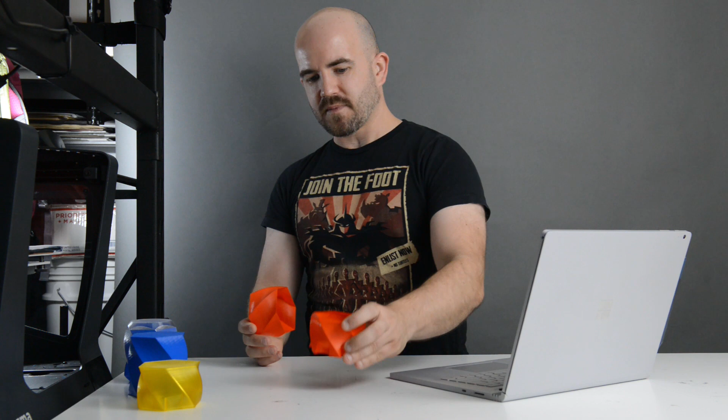However, I'd hate to think that anyone felt that they couldn't do it, because it's really easy, and we'll be going through step by step how to do this in Tinkercad.

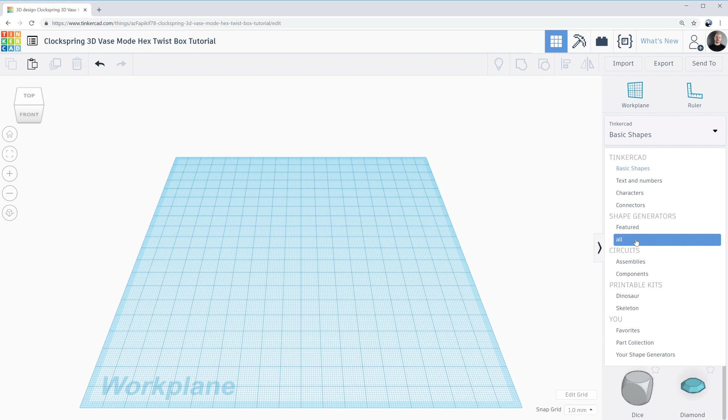So let's use it. If we look over on the right-hand side here, we'll see a drop-down from which we can select Shape Generators All. And that'll start loading up.

Now somewhere in here, and I've done this before so I already know it's on page 6 for me. That may vary depending on the resolution, and I'm running a fairly low resolution for this recording. Twisted Polygon is the thing that we want, so we can just click on that, drag it into the work plane, and there we go.

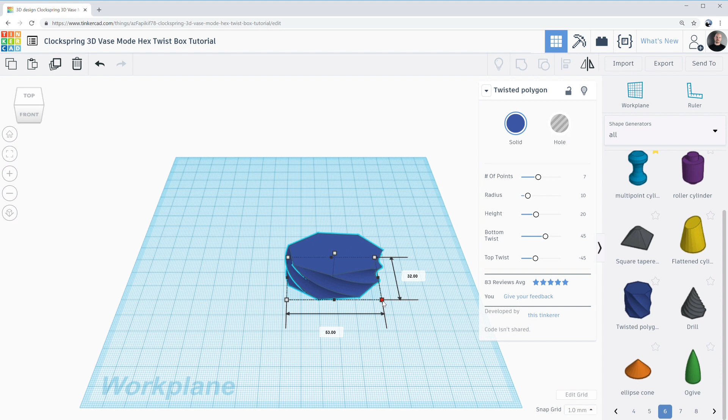Now we need it to be bigger, and it's tempting to just grab this handle and drag it out, maybe hold shift down at the same time and change it to whatever size we want it to be.

However, notice how there's a slight discrepancy in these dimensions here, and that's because despite the fact that this object is radially symmetric, that bounding box changes depending on the orientation.

Now, fortunately, this particular shape generator also has this panel on the side here on the right to control the dimensions. So we're going to use that because that will let us precisely control exactly how big this is.

And where that matters is when we start trying to create two of these things so that one can fit inside the other. Their precision does actually matter.

So let's make this 6 points because hexagons are cool. But really you could use anything you want, it doesn't matter. For the purposes of this tutorial, it can be any number of points, it'll work just as well.

Okay, let's set the radius to 30 millimeters. Wow, is that really 30? Oh, I stretched it out, didn't I?

See, that's the thing. If you drag these things out without changing, well, any distortions you make to the model remain despite making changes to the right-hand panel. So I'm just going to undo a few steps.

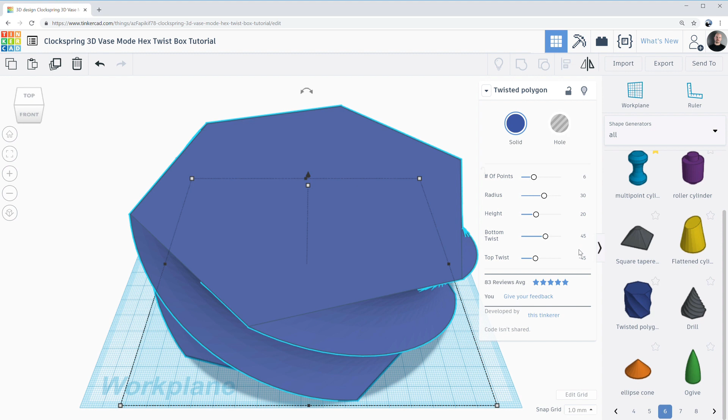See, it was effectively treating that current shape as being 20 millimeters across, where in actual fact, it was now 56.99. So let's undo that again, back down to where it was. Okay, so now this is a bit more realistic.

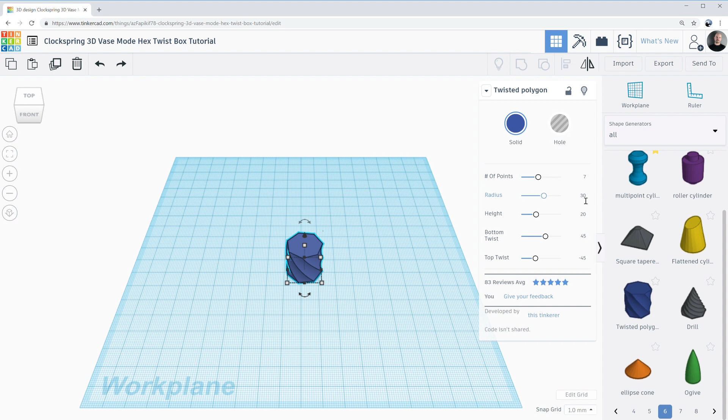So now 30 millimeters across. That's better. And height, let's go with 40.

How do we like that? I'm going to ease off the twisting just a little bit and maybe make that 30 and minus 30.

But all of these settings are arbitrary. You can use whatever you like, and the results that you get out of it may vary depending on the specifics that you use, but this is really easy to experiment with anyway, so make lots of them.

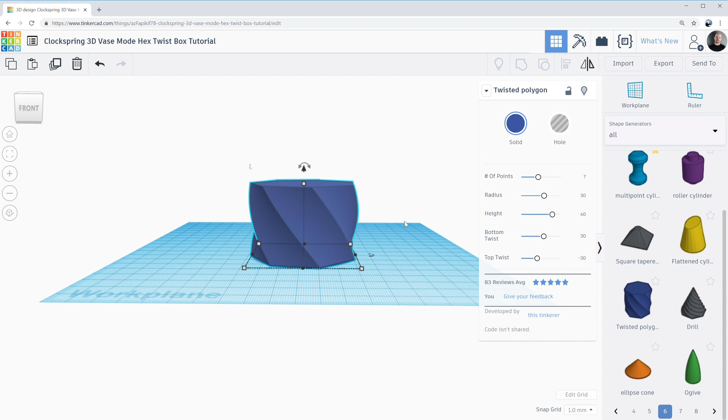Okay, so that is in fact a basic shape. That's all we need. Now, we obviously need to make two things. We need to make a lid and we need to make the base. And we're going to start with the base, just because it's where all the complexity is.

So, these finger hole things—let's make those first. You'll notice that each of these little insets are really just cylinders that have a truncation at the top at 45 degrees. That's important because there's a limit to how much overhang angle we want on a Vase Mode print, for reasons we discussed in the other video, which I'm sure you won't have watched.

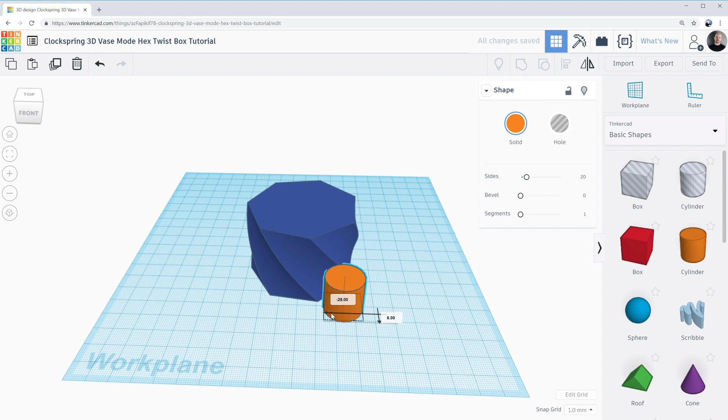So let's start by going on the right hand panel there, back to basic shapes. Find a cylinder. I was going to grab the subtractive cylinder, but I'm going to grab this one instead—the only difference is whether by default it's selected as solid or a hole, so it doesn't really matter too much. I'm going to make this about 15 on both axes. I have no idea what I actually used on this model, but it's arbitrary, so make it the way you want it to be.

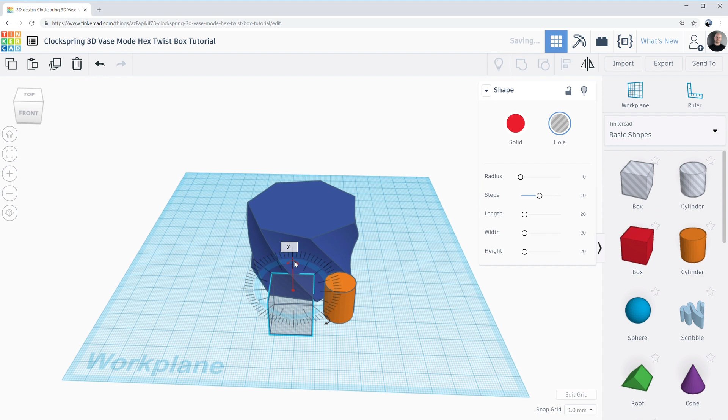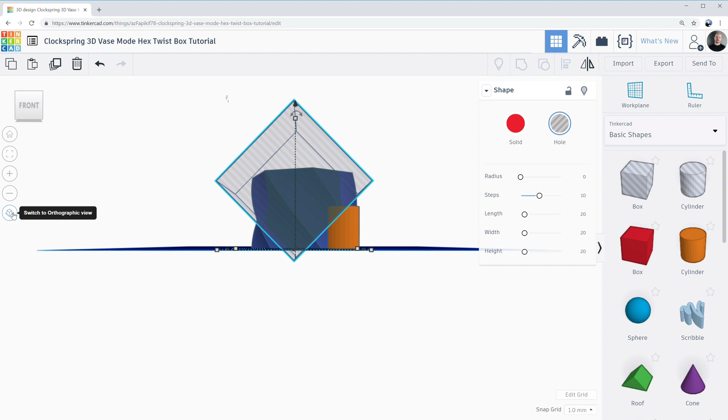Okay, then let's grab a subtractive block. Rotate it 45 degrees. I'm going to grab one of the handles and drag it out while holding shift, because I want this block to be nice and large, since I'm going to use it to chop the top off this thing. At this point I'm also going to switch my view to orthographic, because when you're lining things up it makes it a lot easier to see. I'm also going to use fit view to selection to zoom in, and click on front to make sure we've got a nice aligned view.

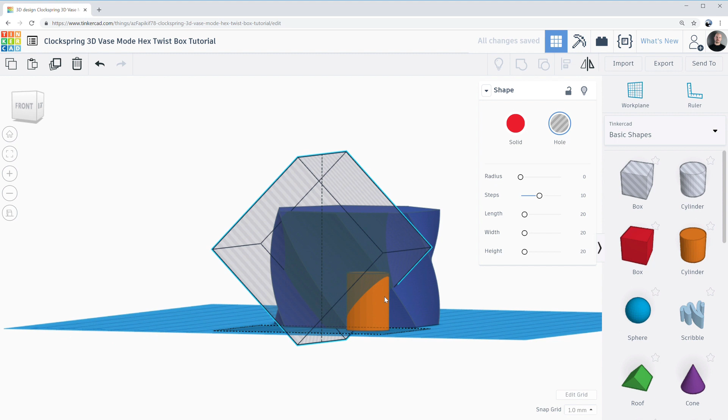So just to be sure, we only have that block selected. Using the cursor keys to move in—that looks about right. Let's just change our angle to see. Yep, we are covering that thing in entirety.

Select those two and group. Now, I did go to use Control G to group, but that doesn't show up well in the video, so I'm trying to use the on-screen controls where possible rather than keyboard shortcuts. But the keyboard shortcuts are so convenient.

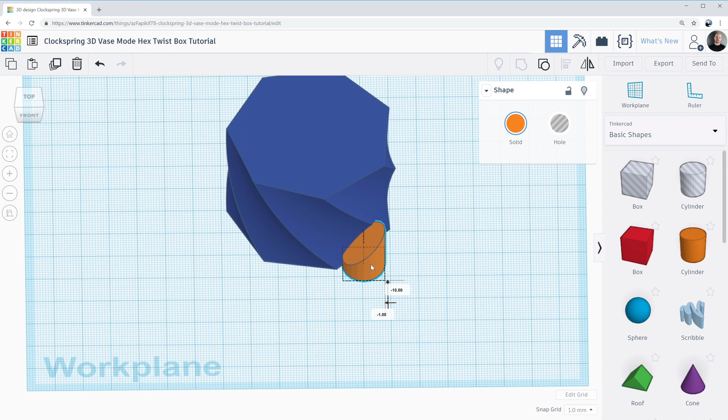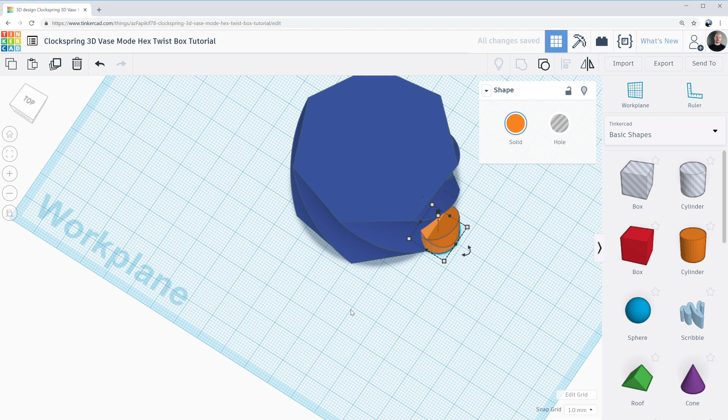Now we're going to move this into place roughly, and it doesn't have to be exact, because we're then going to duplicate—I'll use a keyboard shortcut, Control D—and flip that on that axis, then turn flip back off again. I'll use cursor keys to shuffle it over to the other side, then group these two elements. This is why we don't have to be exact: we're going to center them once grouped, which keeps them consistent, and that's really all that matters. It doesn't matter exactly where these things sit—what matters is that they all sit in the same place relative to the center.

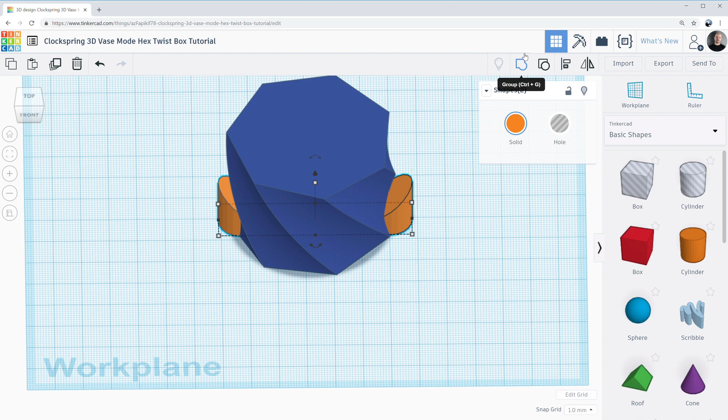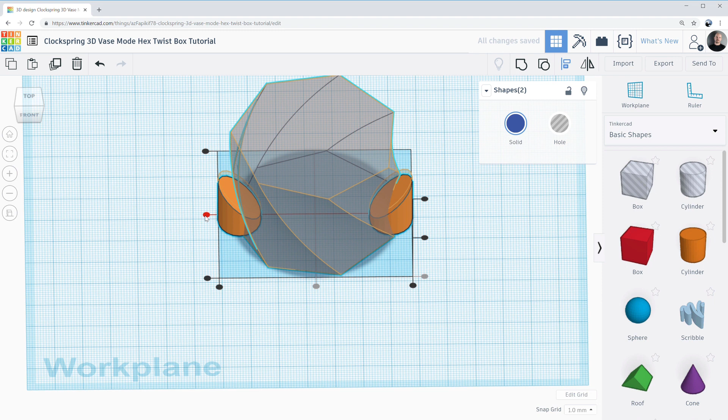So let's do that—we're going to group those two. Now, just so we can see what's going on, I'm going to make the large block transparent, so we can see that these things are protruding into the middle. Let's select the lot, align, and center everything on that axis, and center everything on that axis. Now this choppy bit isn't sitting exactly where I want it yet, but that doesn't matter.

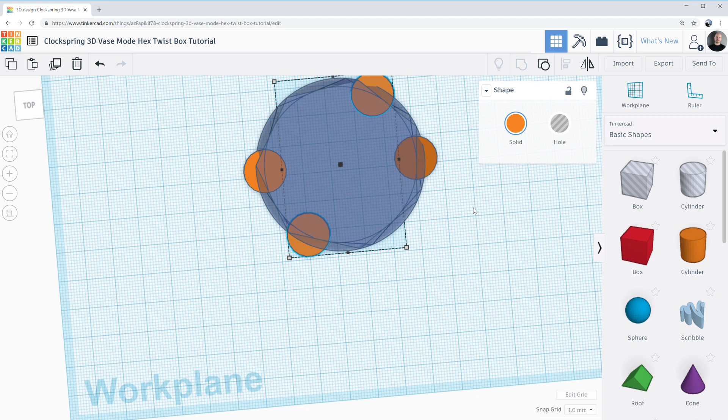We'll start by making a whole bunch of these things, because I like the idea of having 6 of them spaced equally. So drag that angle around—we're just going to type in here anyway, 120. And I forgot to mention, I did Control D to make that duplicate. Now that I've made one duplicate and rotated it, I can do Control D again and get another one with the same shifts as the previous one had.

So now we have equally spaced subtractive elements that aren't actually subtractive yet, but we will make them so. Select them all, turn them into holes, and I'm just going to group them as well for the sake of ease. Now let's have a look where they actually sit.

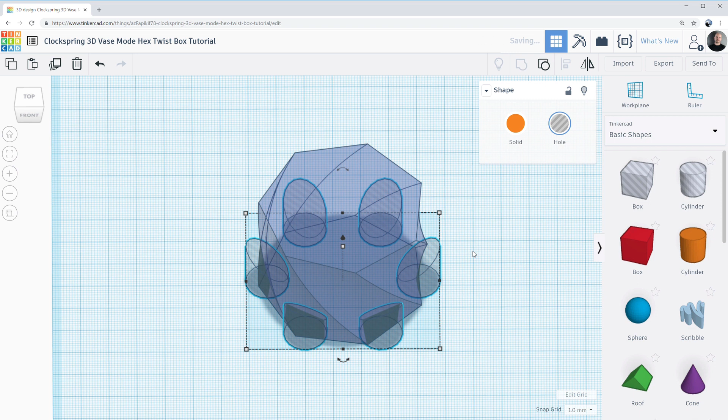Now I don't really want these to intersect with these lines down the side, because I'm concerned that when the lid of the box is placed on, if there are any bits that stick out like that, they're going to end up being caught at some point. I don't know whether that's paranoia or not, but it's a design decision I'm happy to make. So let's just have a look where they're sitting—so at the moment...

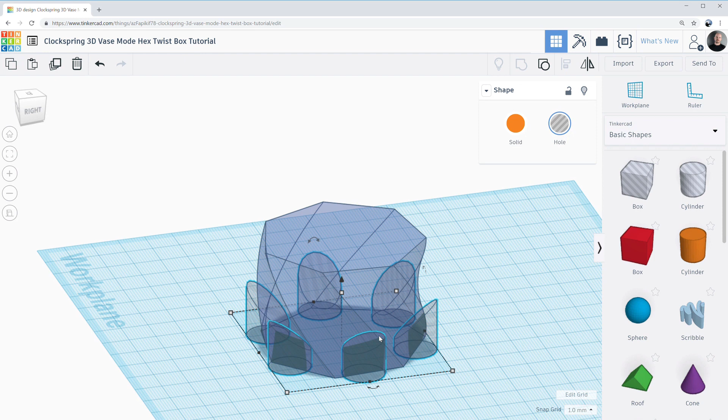This is absolutely intersecting. Let's take transparent off this again. Now there is a keyboard shortcut of pressing T, but I'm not doing that.

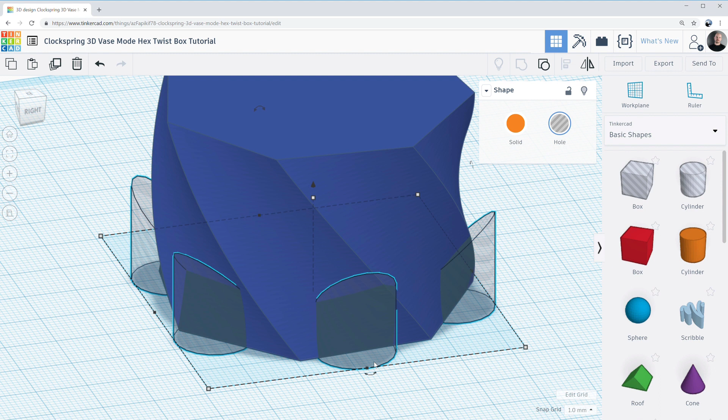Now if we rotate, we're rotating all of these elements around the middle of this thing because they're all centered. So we can happily just shuffle this around until it sits in a happy spot. Let's make this a nice light color so we can see what's going on. That looks pretty good to me. I like where that's sitting.

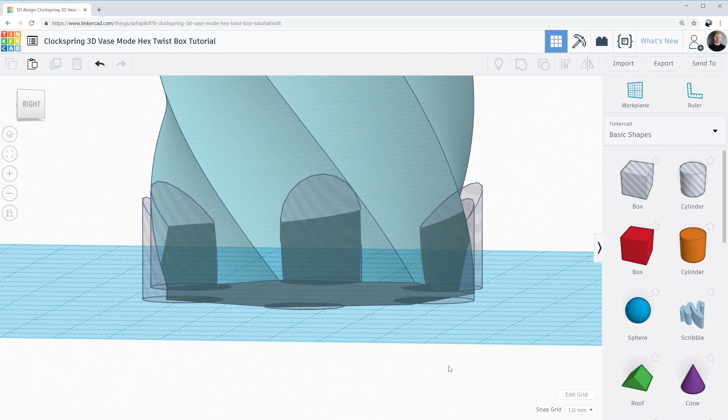Oh wait, no I don't. What's going on there? I'm not sure these are actually centered after all, are they? Well, they look centered. Clearly I was not giving enough consideration to where everything is at. This doesn't look right to me because these should all be sitting consistently in the same spots on each face. Well, that says it's centered.

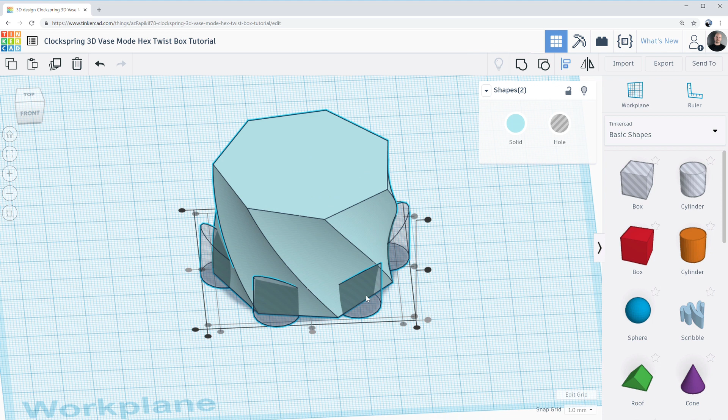Oh, look at that. I didn't make this a hexagon after all. That's the problem. Now, you probably saw that when I first created it and went, oh my God, he undid too far. But it took me a while.

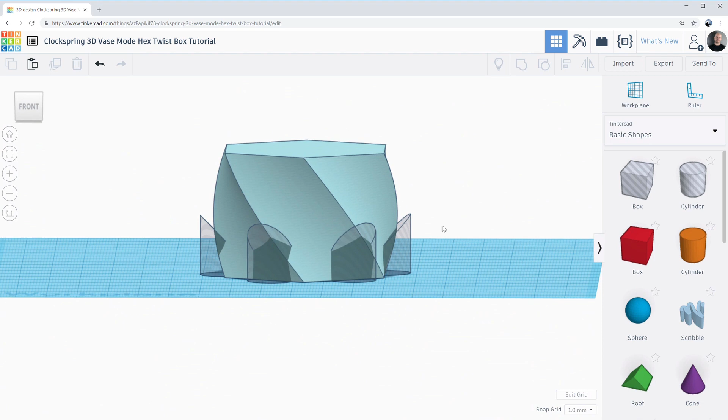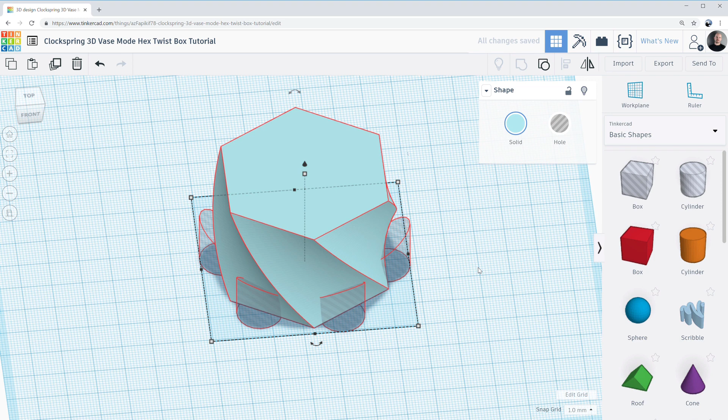Okay, now we can do this. Let's rotate. That looks good. And now they look consistent on each face as well, which is what we want. Select all of them and group. And there we go, so we have the basics.

Now, that's not the only feature that this box has on the base. Next, we need to consider this chamfering on the tops. And this is one of the cool things with Vase Mode: yes, we have these slopey bits up the top here, but because we're printing in Vase Mode, we don't have to worry about this internal geometry. We don't have to cut out things so that we just have this lip, and we don't have to carve out around these internal parts of the finger holes either, because we get that for free printing in Vase Mode, which is really cool. So, next up, let's do the chamfering.

So we're going to do the chamfering in a fairly similar way, in that we're going to create one object, reflect it over to the other side, center it all, and then duplicate it and rotate it. We're going to use a roof this time, which is not a feature I use very often, but it is arguably pretty useful.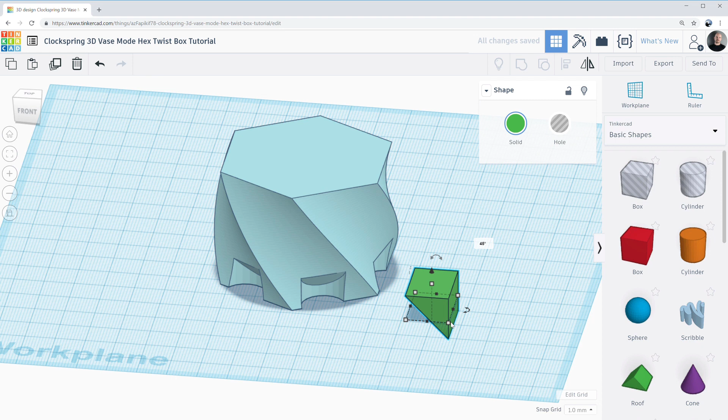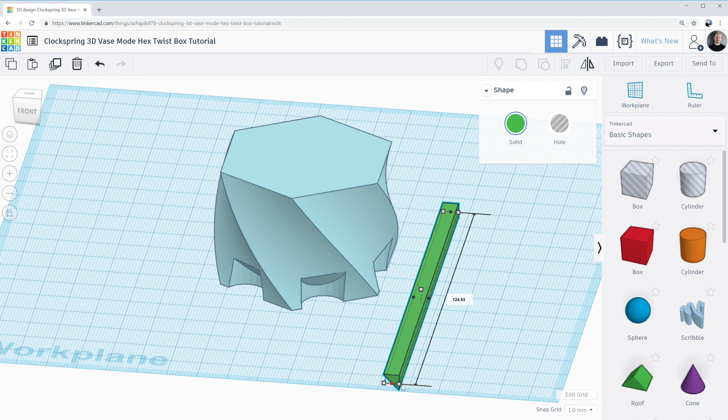So let's rotate this thing so that it's got the orientation that we need, like that. And I want this to be about a 5mm horizontal chamfer. Let's just drag that. I was clicking, dragging, and holding down Shift to keep my scaling uniform. Okay, now I'm using Alt while I drag this handle to keep the change happening in both directions. And now I'm going to align these two objects.

So importantly, we want this choppy-outy bit to be aligned to the top, and we need it to be to some degree along this edge. But it doesn't even matter if this roof element is aligned with that edge, because even if it is exactly aligned, because these sides are curved, we're going to get this irregular effect anyway. So it really doesn't matter. Again, as long as it's consistent on each edge, it'll look good.

By the way, the purpose of this chamfering at the top is purely to make it easy to put the lid on. That came from some of these earlier experiments I did where I didn't have any such thing. And because it's Vase Mode and things flex really easily, it's really easy to find it difficult to put the lids back on. So this was another one where you've got to get it just right to get it back on, whereas with this one, you get a ballpark and it slides on. So it makes a huge difference to the usability of that design.

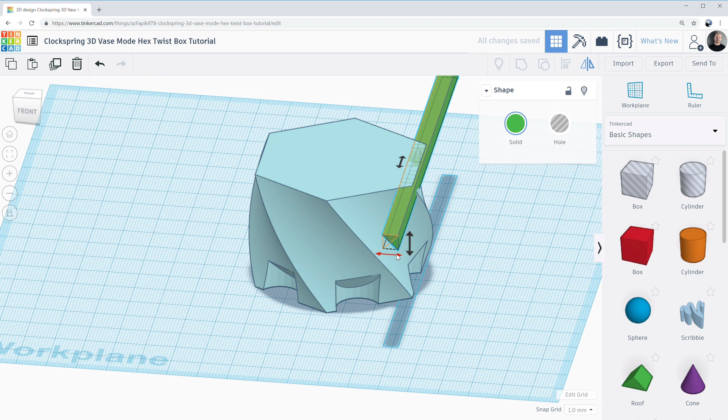Okay, but back to this chamfering. So let's just move that there. Again, fairly arbitrary. Control D to duplicate. Flip that way. And I'm using the keyboard to move it into place. I'm going to group those two things like that.

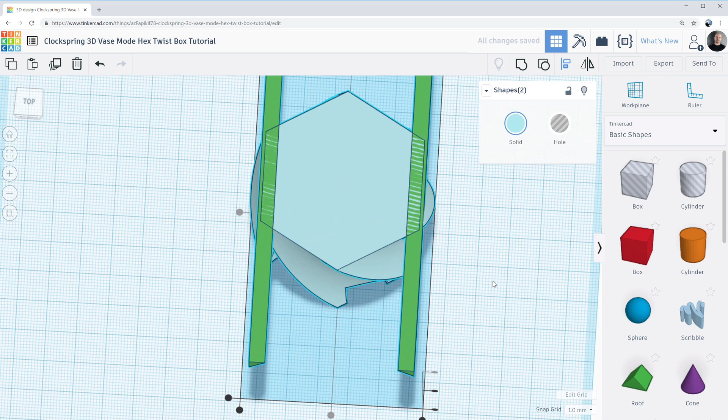Select it all, align, center, and center. Now, it's important that we center on both axes because we want to be able to rotate these roof elements and have them rotate around the center of the object from which we're removing material.

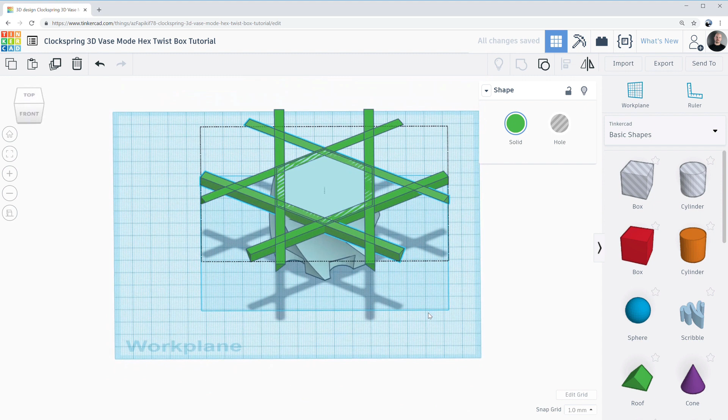So now Control D to duplicate, rotate 120, Control D again, and there we go. Let's select all and then shift-click to unselect the middle bit. Make those holes, select all, group.

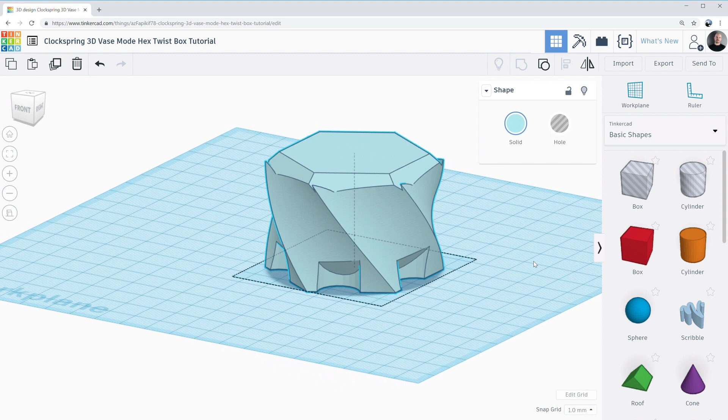And there we go. Now there's a bit more chamfering there than I'd really intended. Oh look, you can see that they were a bit too far in as well. So we've ended up with these little cusps there. Let's fix that. Let's ungroup.

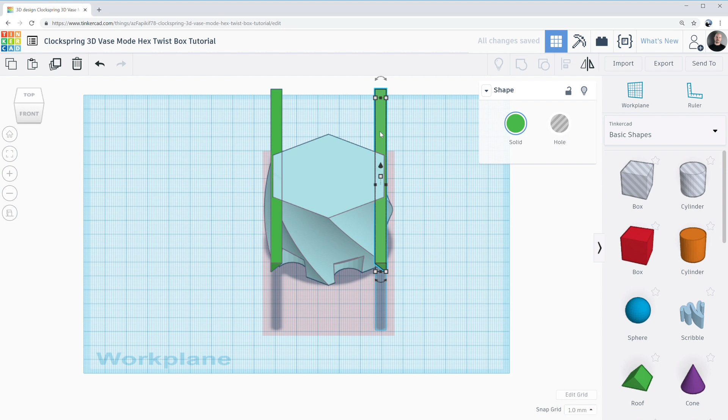Actually, let's just undo back to when we just had two of these things. And then double click to enter the group. I'm going to move it out a fraction. How's that looking now? That's much healthier.

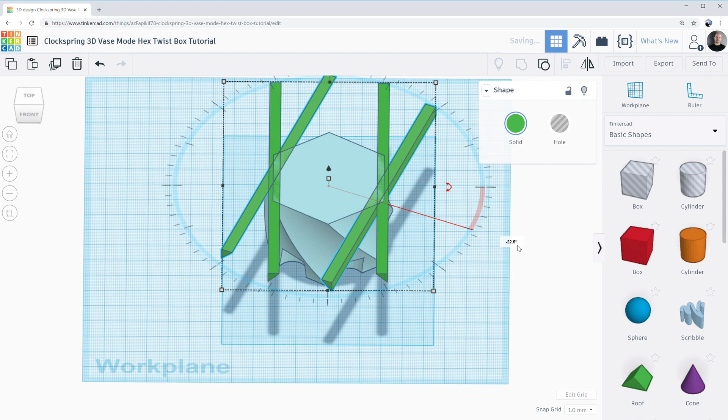Okay, so select outside those objects and we're back to editing everything. Control D to duplicate. Drag, 120. Control D again, and again, select everything.

Shift click the middle box to deselect it. Turn all those things into holes. Select everything again. Group. And there we go, that's much better.

So that is this middle part completed. That's all we needed to do. Which takes us to the lid.

And this is where that discussion from the other video is important, because we can't define this interior geometry. So how do we approach this?

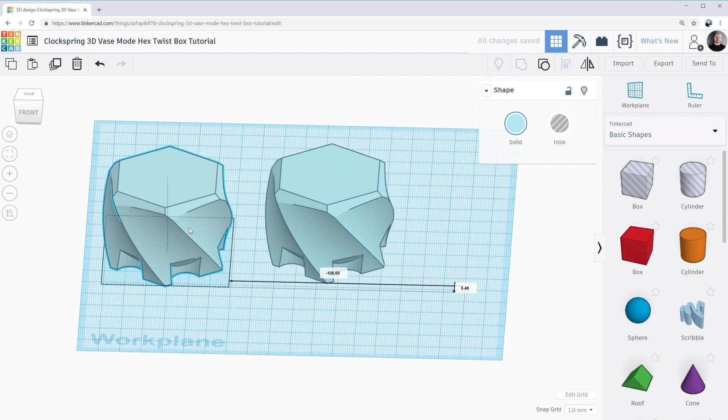Well, we're going to start by just making a duplicate of that base object that we started with, because we know we're going to need pretty much the same thing but with slightly different dimensions. So let's do that. Control C, Control V. Just move this one out of the way. We can hide the base entirely actually. Hide. Okay, so ungroup.

We can select everything except for that middle part. Delete. We can ungroup. Select those choppy bits. And now, you can see by the fact that there's no ungroup icon there, we just have that base element. So the question is, what dimensions do we give this lid?

Let's have a look at a more conventional twist box. So this is not a vase print, it's just a regular print. This has geometry that we can define very easily. So we can define all of the measurements of the inside of this lid, and all the measurements of this inner part as well.

So we can say this dimension is whatever it is, and this is all the same with a tolerance of 0.5 millimeters at each spot. So that way, if we get it in just the right spot, there's a lot of surface area there, and not the flexibility that we have in a Vase Mode print. So that's easy because we can just specify exactly what we want at design time, and we don't have to think about the printer involved.

But with this we do, because we can't specify any of this interior geometry. All we can specify is the exterior. So we need to know what extrusion width we're going to print this at, so that we can calculate how far it's going to be from this outer surface to this inner surface, so that we can size things to sit properly on top of this. So how far does that need to be?

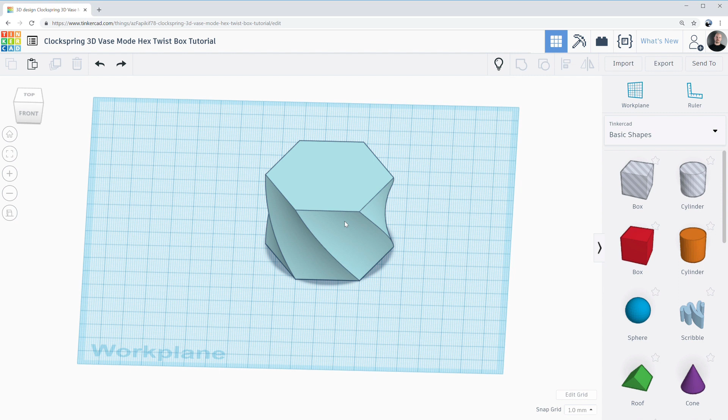So let's go over to Tinkercad. Now over here we have our existing lid object that we need to expand in every dimension. Rather than changing the radius, which will distort the shape because we won't be changing the height, we will use the handles to drag. There are times when you want to drag with the handles, and times when you want to use those parameters on the right. In this case, we want to use Shift.

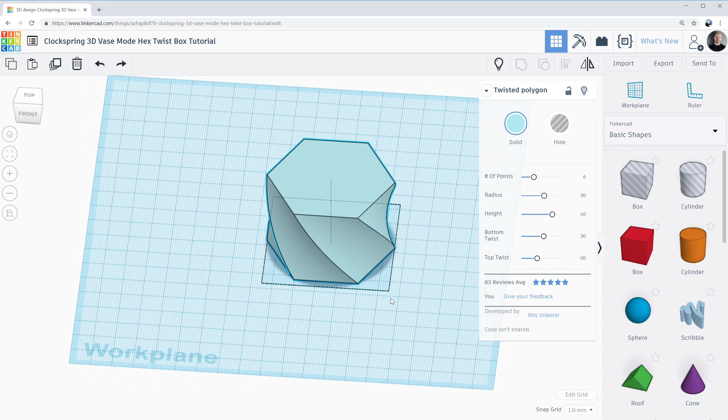We want to click on the right handle, hold down Shift, and drag that to 62. Actually, we'll just go ahead and type this in. Because we had Shift held down, even typing is going to scale things uniformly, so that's fine. Now, one thing we need to deal with is that we just resized the height as well. So this was 40, it's now 41.33. So we need to address that.

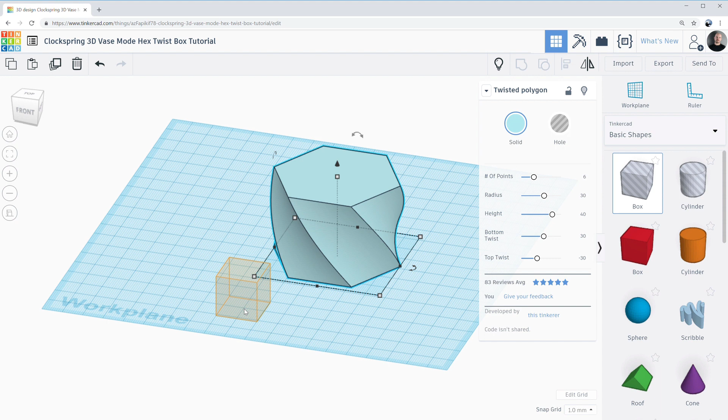I'm going to do that with this big slabby object, and move it up so that the base is 40 millimeters off the surface. Was that 40? Whatever this thing was. Group. And we are done. That's it.

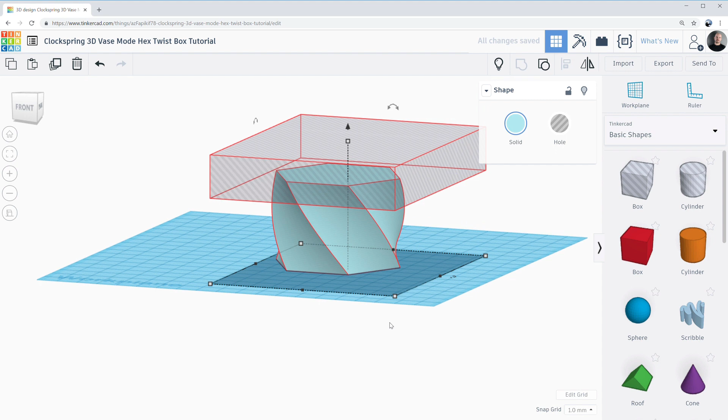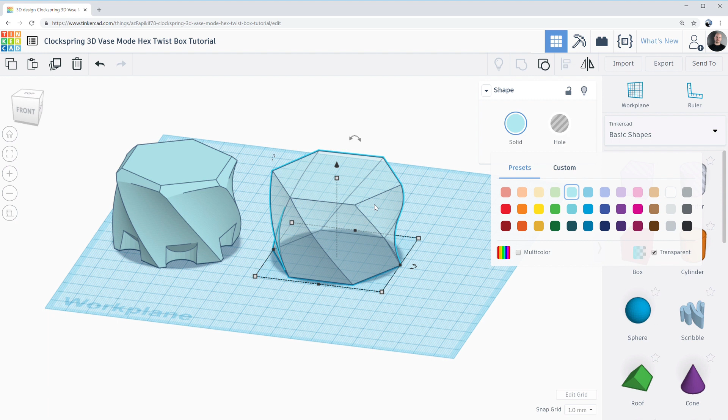That's everything. So let's just do a sanity check though. Let's put these things in place with each other before we actually print anything. So show all to bring the other piece back. I'm going to make this lid part transparent. Now bear in mind that we're printing the lid upside down, but it doesn't really matter because these things are symmetrical anyway, so it won't make a difference. But if you flip things around in here, you'll find that the orientation is not quite the same anyway, but that's all right. It's still symmetrical and it'll be fine.

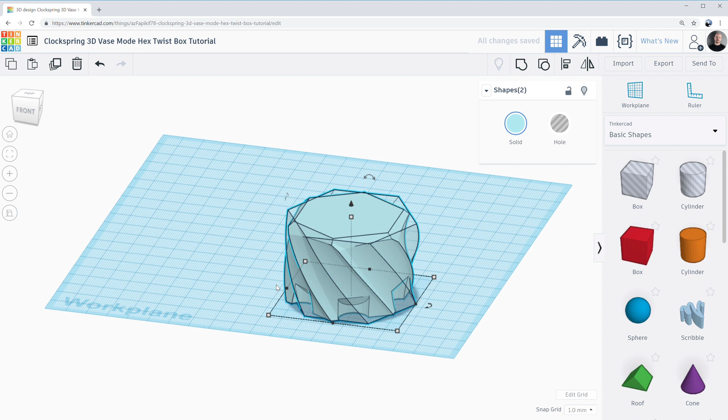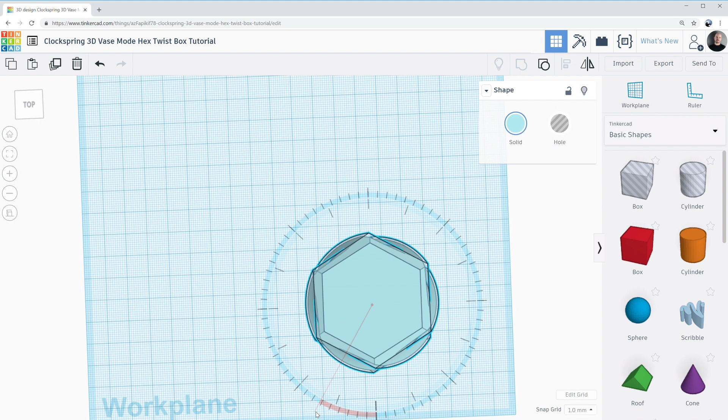So, okay, put these things together. Maybe we'll use some alignment tools, seeing that we have those. Okay, and let's just look at the top and rotate. I mean, this is again just a sanity check, so it doesn't have to be exact. But see, we've got some tolerance there.

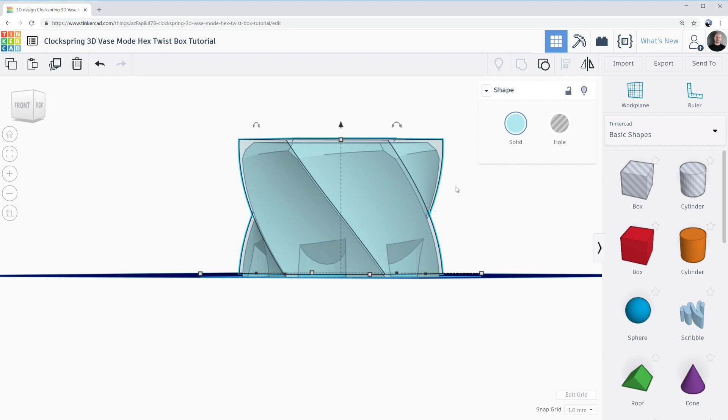We'll also move this up a fraction using Control and arrow up to move things. Now our snap to grid is set to 1 millimeter, so that moved it 1 millimeter up. And this base is probably going to be, what, 3 layers at 0.2, so it's probably going to be about 0.6 millimeters anyway, so roughly okay. And looking at that, that looks pretty good. That looks pretty much as I would expect.

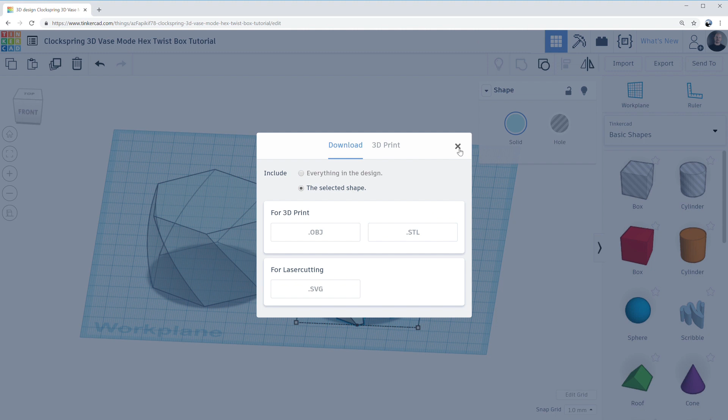So from there, let's move this out of the way again. We just export as STL, and we do the same thing separately for that one, because of course we need to print them separately since they're Vase Mode objects. While slicers will generally be able to handle having two Vase Mode objects on the bed at the same time, you won't get genuine Vase Mode because you can't have that gradual increase in height. Instead, it'll fake it by doing layer by layer with no infill and so on, which is not the same. And we're done. That's everything.

That's the entirety of the design for this Vase Mode twist hex box. So I encourage you to make your own, change it up, improve it, make it different, and let it inspire you in some way. I hope it can inspire you in some way. Twist boxes in general are really cool, and at some point I'll do a tutorial on doing arbitrary profile twist boxes like these ones, although that will be in OpenSCAD rather than Tinkercad, just because we start needing the advantages of being able to code things to get these done. But it'll still be very easy to do.